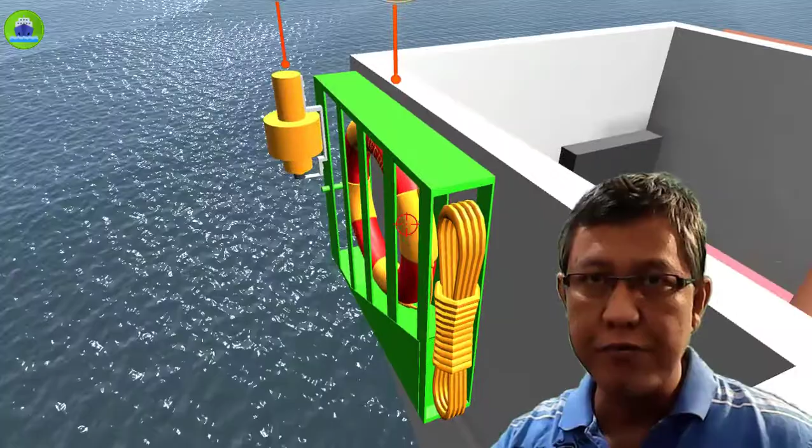This is a 4 kilogram unit under the SOLAS regulation. It releases, and it has a rope attached to the ship that should be more than 50 meters, I think. It also attaches to a smoke buoy that will float and emit smoke for more than 15 minutes - it's all in the information provided.

It also has LED lights, so at night you can see it flashing. This gives a higher chance of finding the crew member who went overboard.

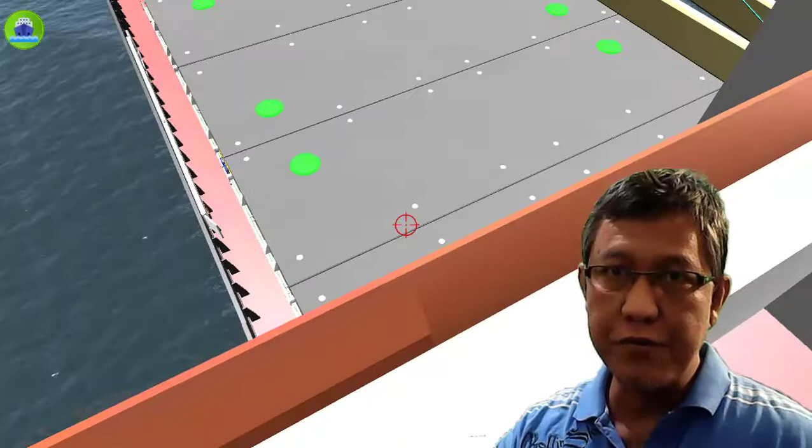So as you can see, you can roam around, walk, jump. I can actually jump from here to that area, the top of the hatch cover of the cargo holds, but in reality I'd be dead, because that's like 5 stories high from this point, or even higher on big ships.

So the whole layout of a ship, if we're talking about merchant vessels - not naval or military vessels, but merchant marine vessels - in most cases follows a very common design that you'll find on board bulk ships, tanker ships, and cargo ships.

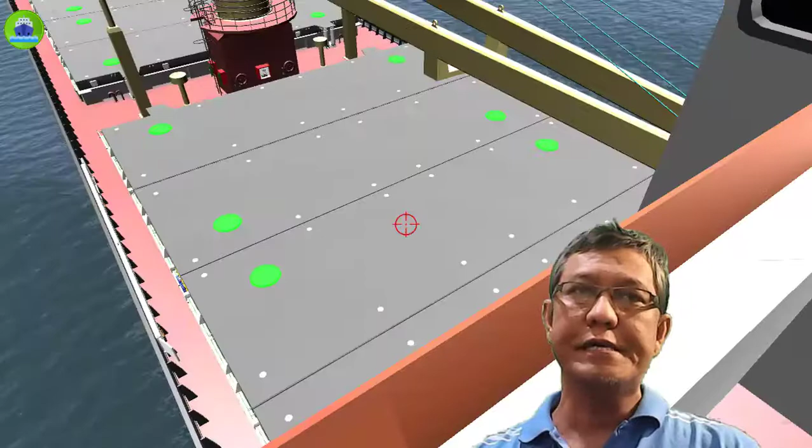It's a little different when you're on a car carrier, or other ships like containers. A container ship can also have a similar layout, just that you don't see this particular feature. You'll have a different cargo system in there, but they're almost similar.

Right, let's get inside. It opens. As you can see, this is a very interactive virtual tour, and you can roam around the bridge. This is the navigating bridge as we define it, and it's composed of different equipment, containing all the navigational equipment found on board merchant vessels of any type.

For example, right now I'm looking at the so-called radar, and we have here an ECDIS, electronic chart display. You'll notice there's a circular radial spinning - if you point your mouse and click on it, it shows you a description, or it might show a video clip, an animation, or audio information. So it's very informative.

Now it's up to the student to see what's applicable to him or her. He or she can listen, watch, or just read at the same time. Theoretically, the students can make reference with the textbook and other educational materials to confirm the information that has been laid out.

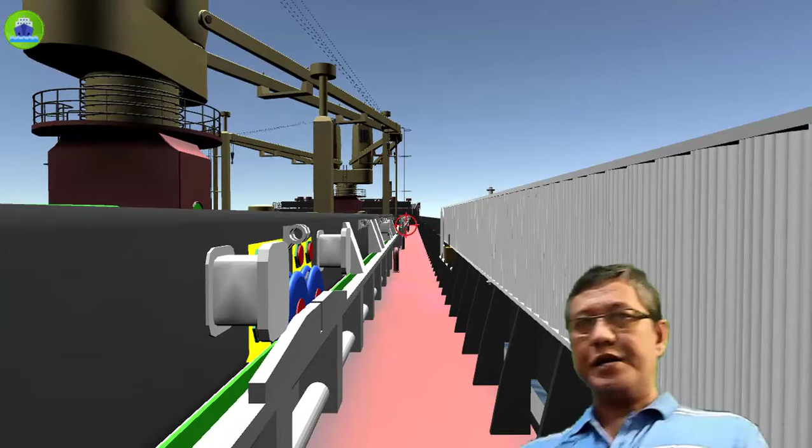You notice that I didn't show you anything much about the accommodation and the engine room. That's a lot of 3D rendering, it's really huge, and it takes a lot of time and effort to do so. Maybe we can do that also in a separate project, but it would take some time, because rendering 3Ds in the engine room, you are talking about thousands and thousands of 3D objects.

What is my point? Let's just get nearer to this one. This is a roller guide for the hatch cover. That roller guide alone has a lot of meshes, as we call it, or vertices. So it's basically a very complicated 3D to put together, and it eats up a lot of space and memory in the graphic processor of the computer, so it slows down the system.

Now let's go on top. This is the hatch cover. Hatch is also a cargo hold in bulk ships and general cargo ships, so it has a cover.

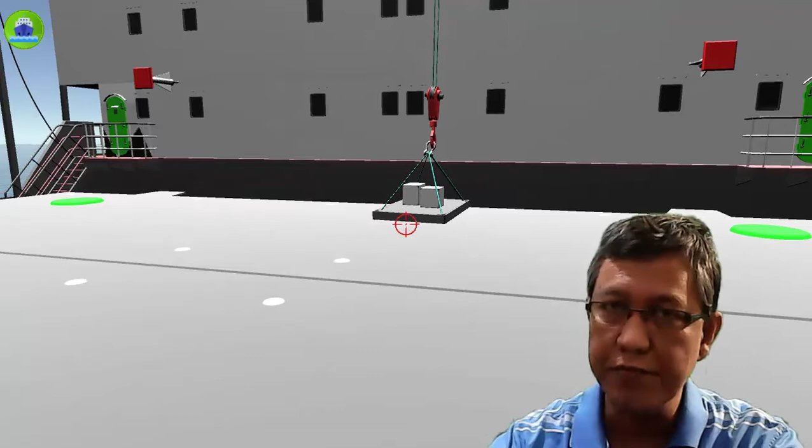As you can see, this is a crane. I don't know what it's made for, maybe it's a Liebherr type made in Germany. I'm not affiliated with that crane maker, but you'll find those kinds of cranes are very particular in most kinds of ships.

Now, this is not a gearless type of vessel. When you say gearless, it doesn't have any equipment that is capable of loading and unloading herself - herself meaning the vessel, since the gender of a vessel is she. I'll talk about that later in some other discussion.

So when you say gearless, you don't see this kind of cranes and equipment. They have no cranes, no unloading system, it's just the cover of the hatch and that's it, along with some other equipment related to cargo operation. But you don't see cranes.

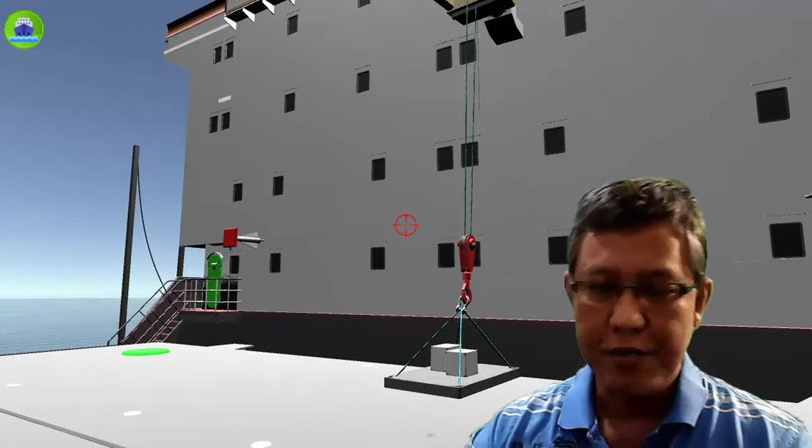In here, we could probably create a door. Actually, there's a door there right now and I can get in. Let's just go there. If I get into that door, there's stairs, and upon climbing the stairs I could start the hydraulic motors.

Once I start the hydraulic motors, I'll be sitting inside that cabin control, the black one you can see as I'm pointing right now. In there you'll be able to see levers of different types controlling different functions of the crane. One is for hoisting, lowering, or heaving up the cables, the runner, or the hook. The other lever is for the jib or the lever arm - it's like moving your arm up like this. And of course, the turret, the whole body including the arm, you can swing sideways.

To demonstrate that, let's just say we start a hydraulic motor here. Okay, so now there should be a sound right away, and then I could just click this one, and... right, wala na.

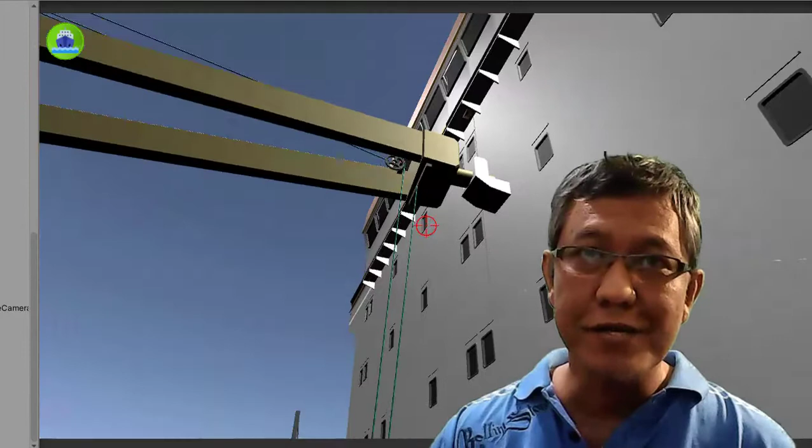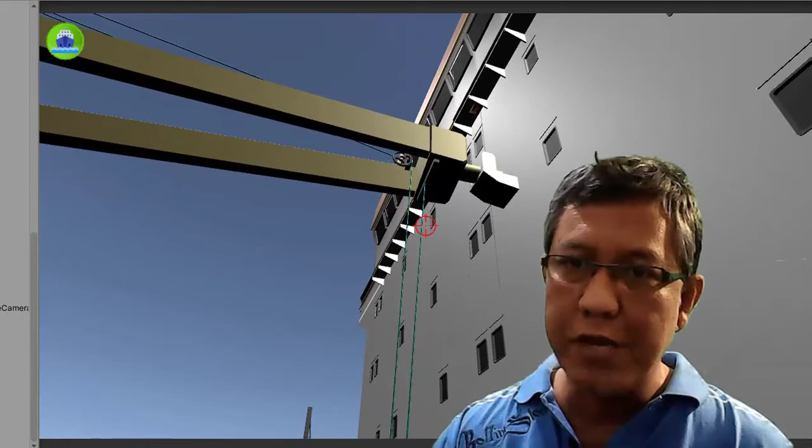A while ago, the crane system got stuck in that area. One missing piece we didn't put in is that in reality there should be a so-called limit switch. It runs about a meter below the boom, and when that limit switch touches, or this hook assembly including the pulley touches the limit switch, it sends a command signal to the control cabin of the crane, and it should stop the hoisting or the cable running further, going up further close to the boom, so it won't touch. Because if it doesn't have a limit switch, the tendency is that it will snap.

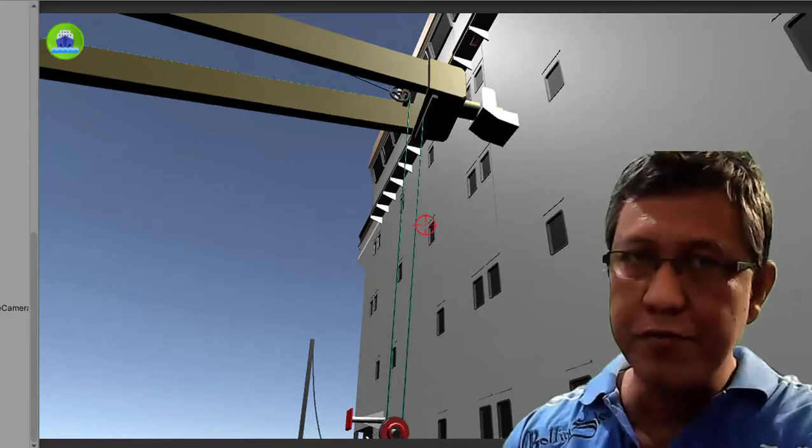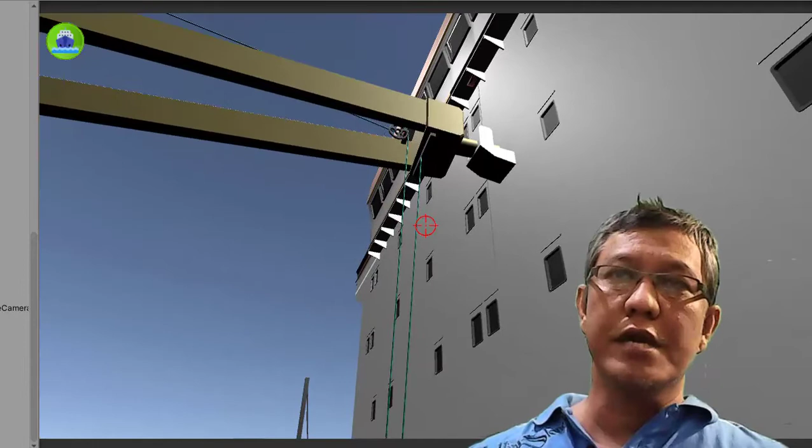It will of course break the cables, because this is a very strong - let's say this is a 5-tonner type, capable of carrying 5 tons - crane, and you could imagine how strong the cables are, and the motor that's actually pulling the cable. So basically it has a great load, and if it reaches that limit and doesn't give way, you will lose the cable, it will snap, and it might end up damaging the crane itself, or in worst cases it could damage or injure the crew operating it.

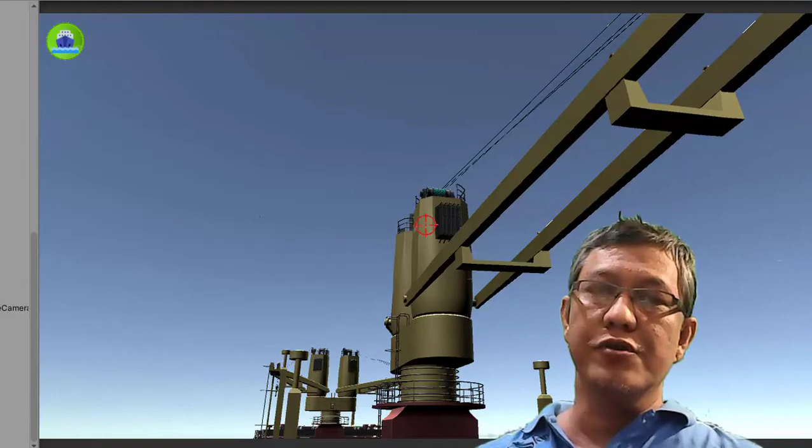Now when operating a crane in this virtual reality, players can actually interact with each other, meaning they could be in one scene, one environment. For example, if the other user is standing somewhere, virtually the one operating should be able to see that person. And if that is the deck officer or another crew member communicating with the crane operator, they could communicate two-way to proceed with the operating procedures.

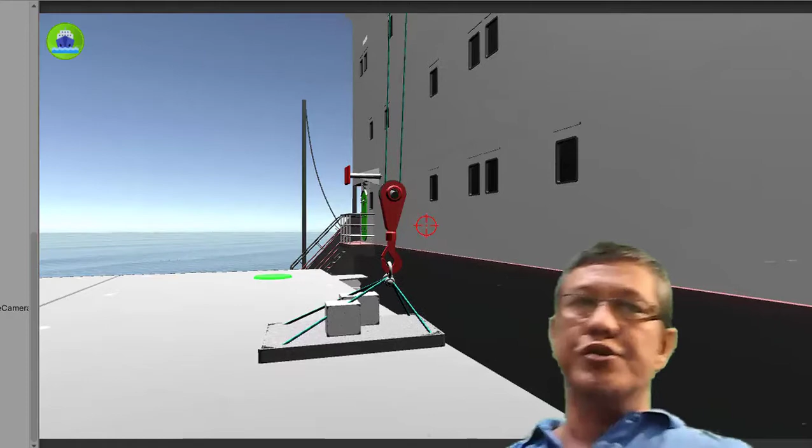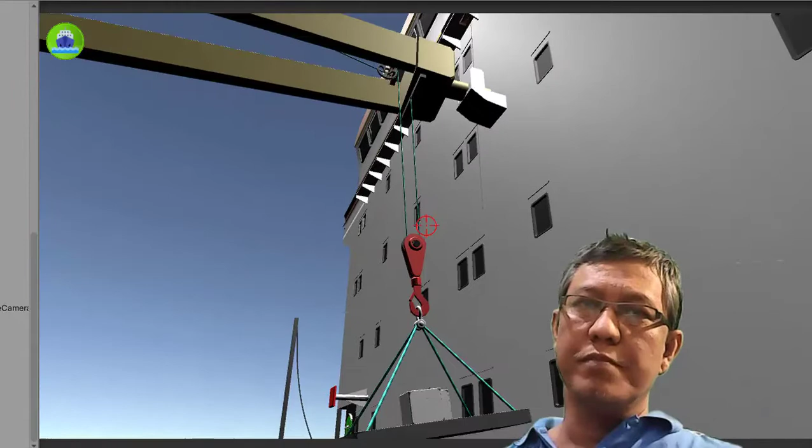So I'm going to show you one demonstration right now. I'll do it remotely for this moment. I'm going to heave up this cargo, it weighs about 20 tons. As you can see, the cable is being pulled up, now it goes up a bit. And as you can see, there's a little bit of dynamics in there, the swinging, because it's affected by gravity.

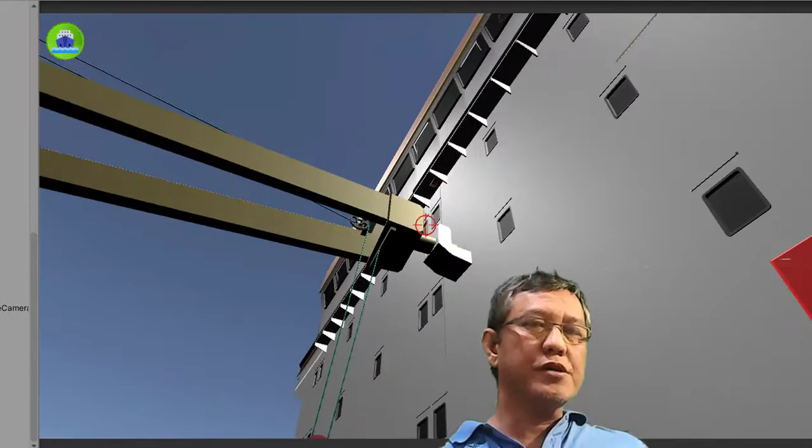At the same time, since the vessel is floating in the water, it's also affected by the dynamics of the water movement. If there's a strong wind, a strong wave, and a current, and you shift the weight or cargo from one side to the other, it displaces or moves the center of gravity in many ways. The center of gravity of the vessel will move dynamically, and at the same time the center of gravity of the crane also moves.

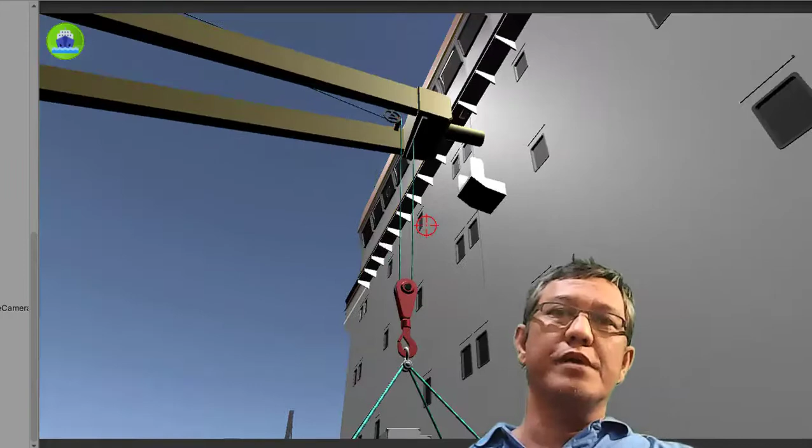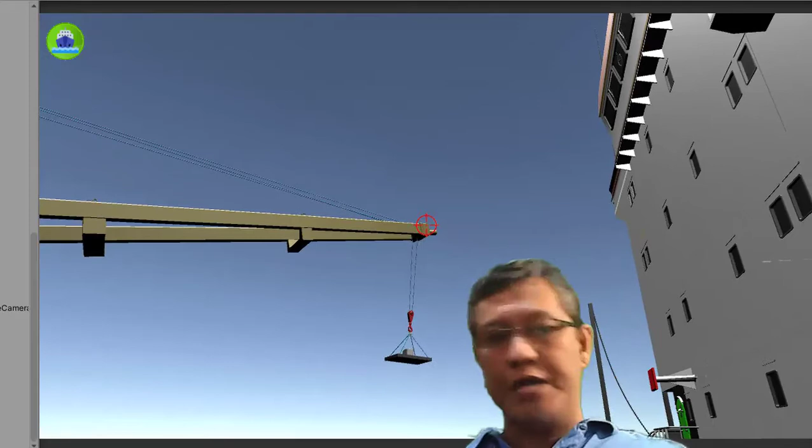So just to give you an example, let's bring it up a little bit and swing it to the starboard or right side. If that's 20 tons or even bigger, and I put it on the starboard side of the vessel, the center of gravity of the crane will shift into that area, and the weight hanging there will also move the center of gravity toward that point. Now you have a lot of stress or tension in the cable, including the arm and the whole body or turret.

If we call it like a human, that's the torso. So we can actually apply dynamics of physics into the vessel so it behaves the same way. If this is a heavy weight, then this vessel should, in layman's terms, start tilting. Of course we call it... what do you call that? I forgot the term, it's been a while.

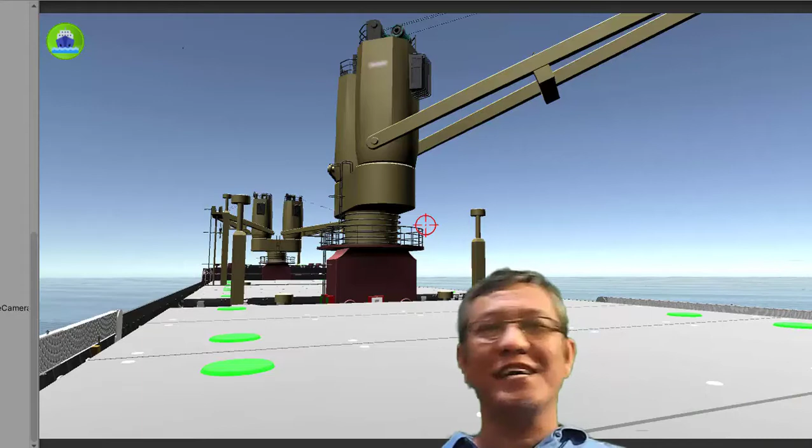Inclination, it's called heel. H-E-E-L, it heels. But let's just use the word tilting, or in Tagalog, tagilid. It should behave that way.

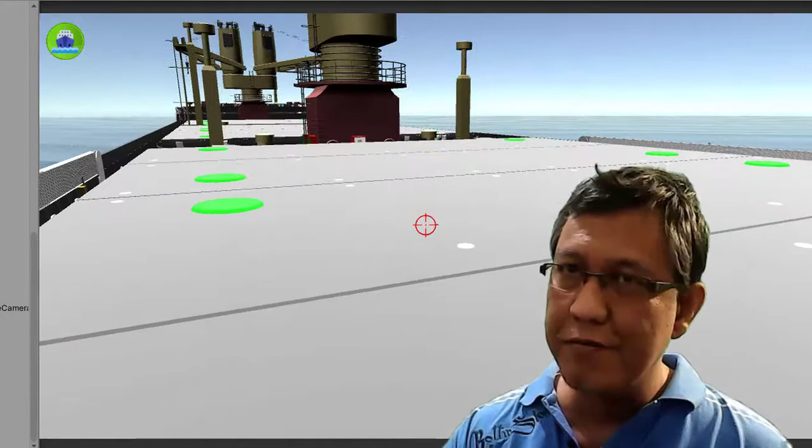At this moment we are not doing that, but we could apply it. As you can see, the water is calm, but we could make it a strong wave with gale winds, and it should affect the vessel accordingly. If the vessel is alongside a pier, wharf, berth, or terminal, the effects depend on the location, but in an area with strong currents, like the Mississippi, it should be able to affect the vessel significantly, along with the cargo, while the crane is moving. As you can see, the crane and cargo are clear from the top of this area.

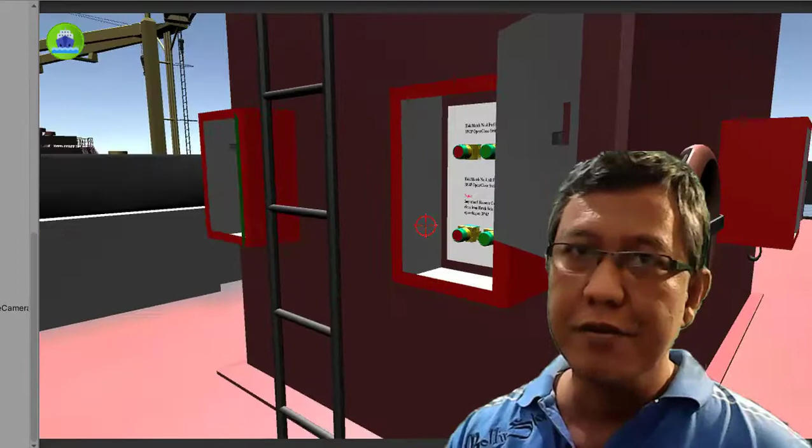So I can even run it, see? Let's start the hydraulic motor again. I'm just going to tone down the volume of the motor.

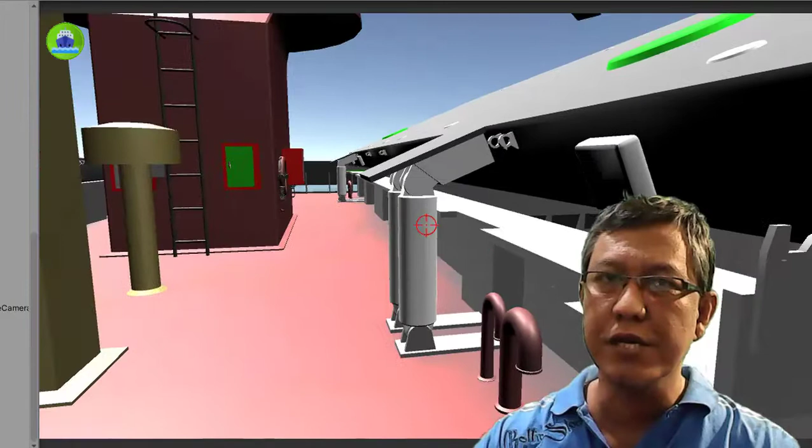As you can see, I should be able to control different hydraulic levers. In most cases, these systems that open the hatches use a hydraulic system. Hydraulics basically utilizes hydraulic cylinders and hydraulic motors. We'll discuss those things in other lectures or discussions.

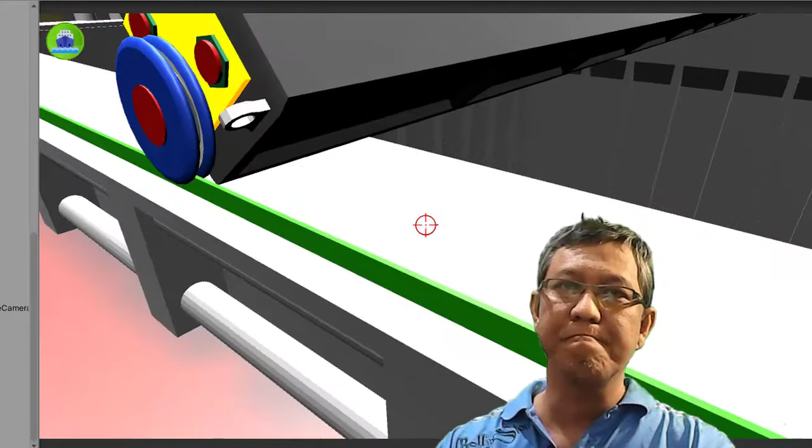You can see it's opening right now. As you can see, something's not right, a life buoy is floating inside. This is the cargo hold.

As you can see, a bulk ship or general cargo ship can handle a lot of cargo, loading and unloading in that area. When I say cargo, mostly they are dry cargoes, especially in bulk, such as wheat, rice, sugar, iron ore, and many kinds of cargoes. In general cargoes, there's a variety of types and sizes, you could load a truck, pallets, drums and boxes, many different shapes and sizes of cargo that can be secured there.

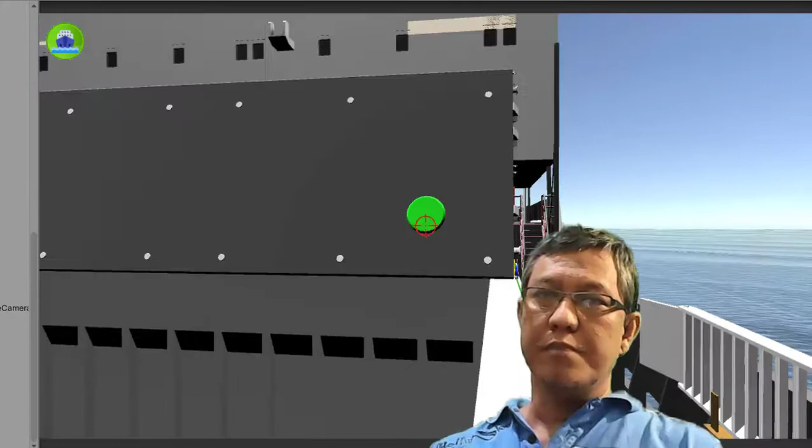But in bulk ships, typically intended for bulk cargoes, mostly they are of the same type. So for example, if I'm loading wheat here, the whole hold will be loaded with wheat. And that's why I mentioned earlier that this type of opening, or hatch cover, is a folding type. It's not that popular anymore in large or big bulk carriers because of the integrity of the water seal.

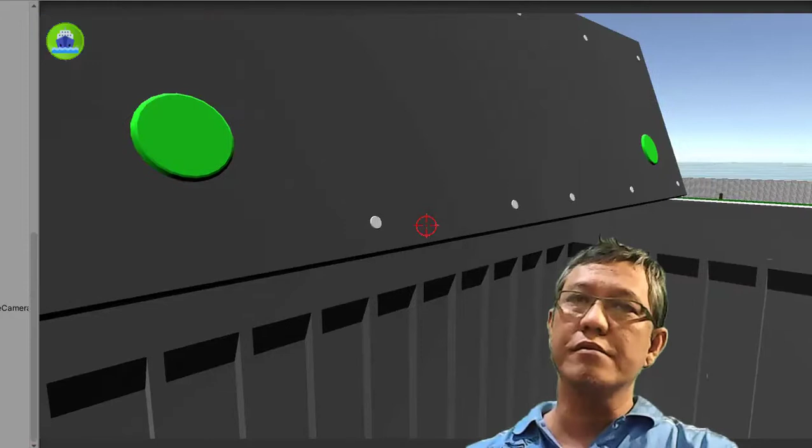Because when water gets in, chances of the cargo being damaged will be great. Of course, they are insured, but there's a lot of money being wasted already. The water that gets into that area may react with the cargo, causing trouble or danger to the crew. So dangerous that it could literally injure or damage the whole ship, such as explosion and fire, and we don't want that to happen.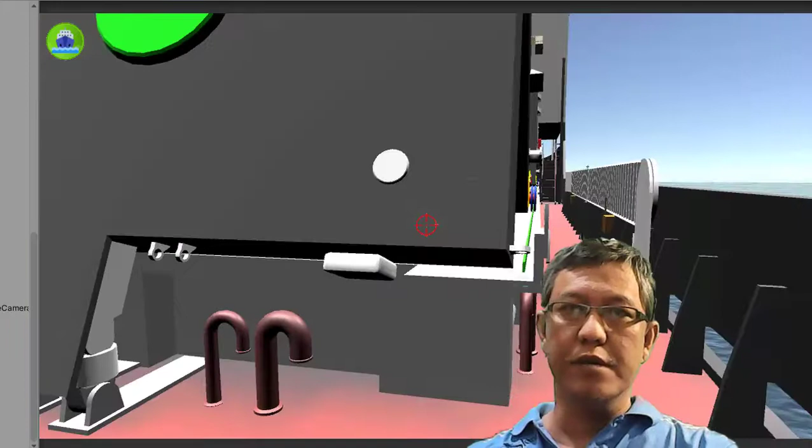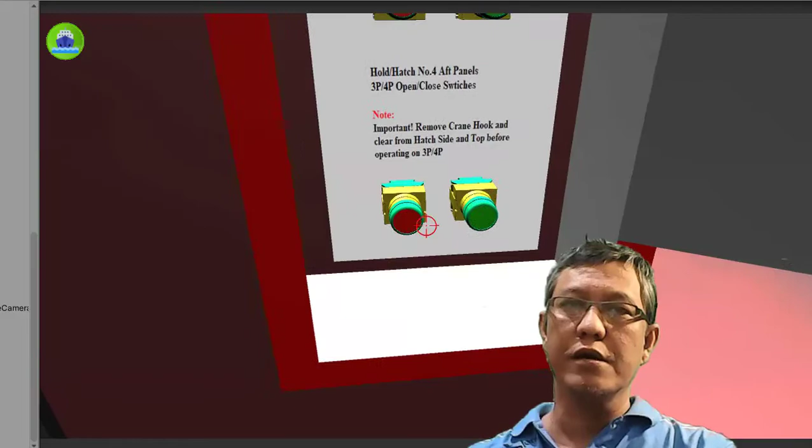So as you can see, that's what we are doing right now with this design. This is not supposed to be the one that opens the cargo hatches; it's supposed to be just a switch to start the motor. But temporarily we have designated this as the one that closes this cargo.

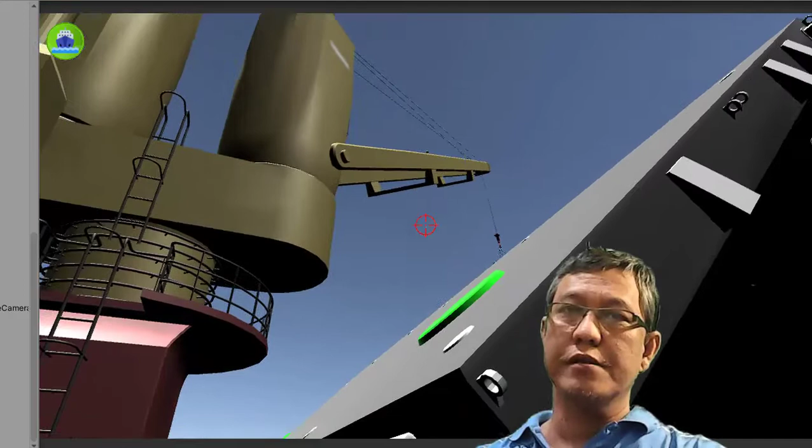So we're gonna bring that crane a little bit further, and we swing it to the right again, or to the left side of the vessel. As you can see, the weight is not that heavy, so as the turret or the arm swings, it's also swinging sideways. You could see this actually in real life when you are on board a cargo vessel that has this kind of cranes or cargo operations.

That's why the crane operator should be well trained and certified to operate a crane. At the same time, he is not the only one doing the job, especially when heavy cargos are involved. There should be a responsible officer or another crew member coordinating with the crane operator. In fact, the crane operator is basically just following the commands of the officer or the other crew, because in most cases, in the position where he or she is sitting, he or she won't be able to see everything. While the one on deck sees what's going on, and can direct the operation, such as putting this crane back to its cradle.

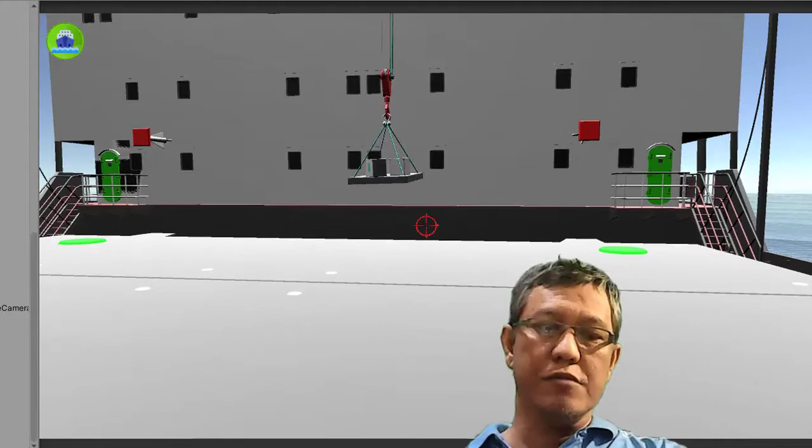In most cases, the operator cannot see it right away. Did you see that? When I drop the cargo, it hits the hatch cover. Let's do it one more time.

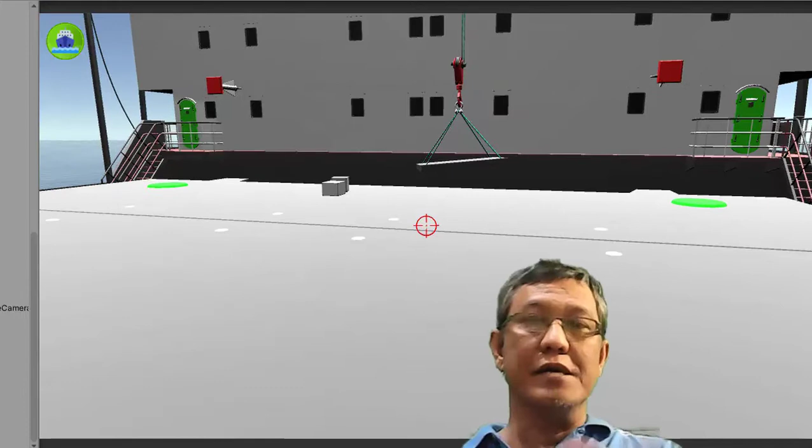Now that is something, because if you manage to observe that, it passes through the steel. In reality, this is a steel, a rigid body. Both of them are solid objects, so in reality it should not pass through that area, but it did. So something is not right again with the configuration of the program or the project. But as you can see, the other two boxes went off, so the physics is good actually.

So we're gonna heave up a little bit and clear this. Oh no, something is not right. We're gonna heave up this one a little bit so it gets clear from the bottom, and now we can lower the jib, or the arm.

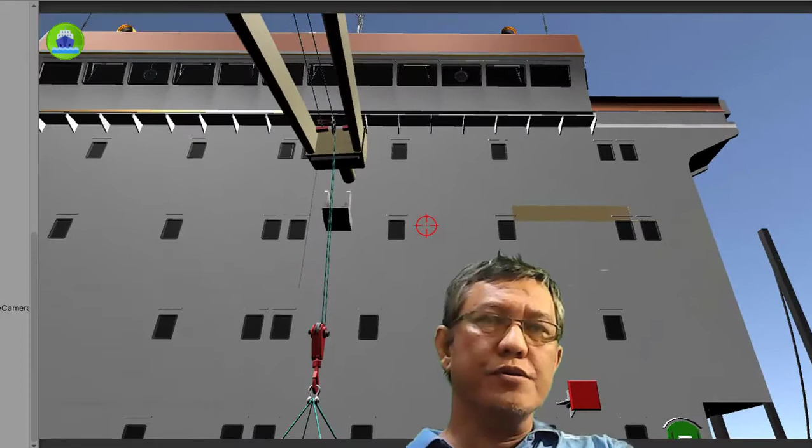As you can see, the crane operator will not be able to see this directly from his or her position in the control cabin, so he will have the signal coming from the other deckhand. So we're gonna just center it and then bring it up.

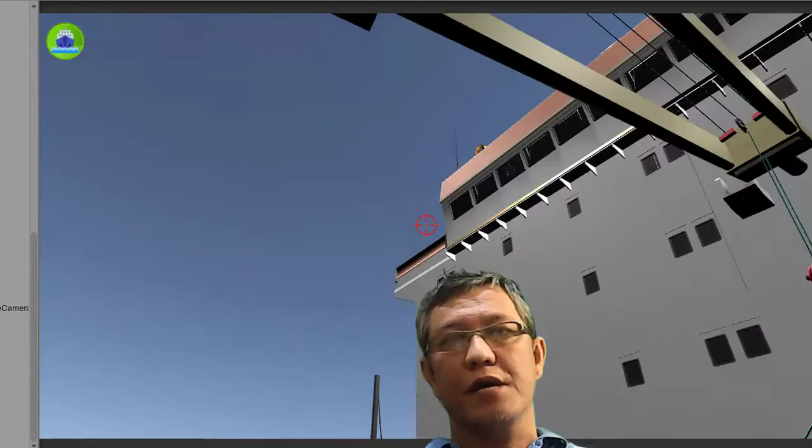Of course, in most cases, if this is not in the right location and you go all the way down, there's a limit switch fitted in the system, wherein if you go down that far, it should stop, because it has reached the limit of the crane. Otherwise, if these booms go down further, some structural part of the ship may be damaged or destroyed.

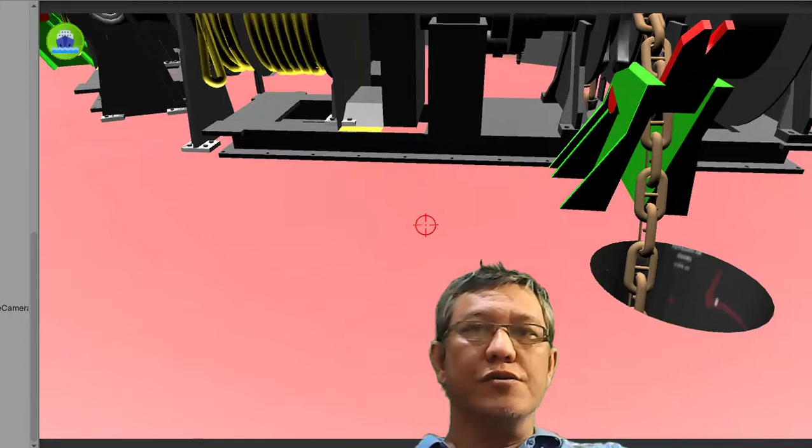Now you could see also that this is a hawse pipe and something is missing. There is no guardrail. In reality, you can just go through that hole and then it will be unfortunate that you're gonna go down all the way to the water. Oh no, that's not...

Now I got it, and because the anchor is inside, I am stuck inside. So the purpose of the guardrail actually is to guard and protect personnel being...

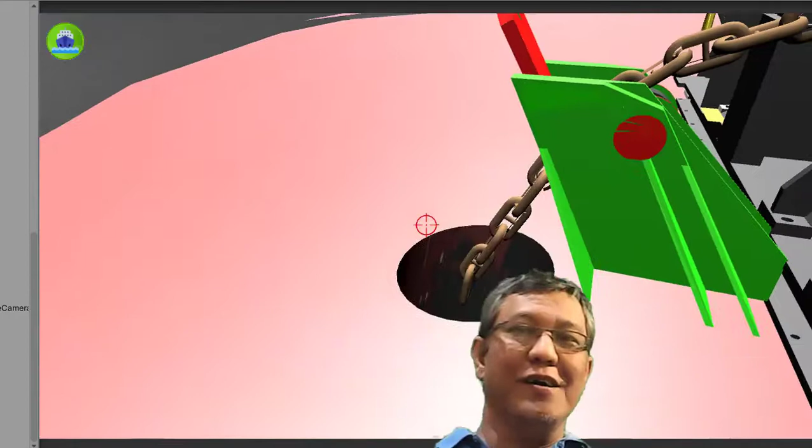That's a big hole actually. It's a hawse pipe. It's where the chain of the anchor passes through.